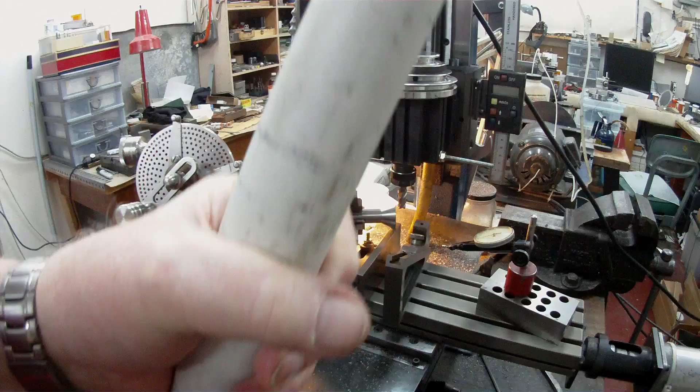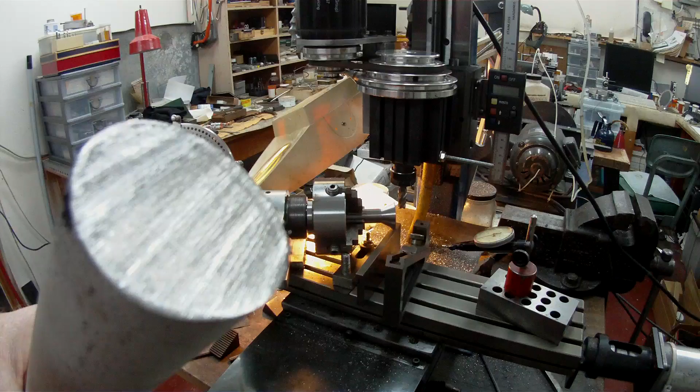If you've seen my other videos, the previous one indicated this material comes from a great big chunk of... I hope you can see that there. It's 1 7/16 diameter. I think it's an axle shaft, it has to be, I would think. Maybe it's a rack and pinion, I don't know, but I'd imagine it's an axle shaft, and it's really hard, really tough material, but the finish is very satisfying, providing you're able to machine the material.

Excuse me a minute, let's put that down. So when I machined, let's see if I can get a pointer of some kind. As usual, I'm not ready. Okay, if you can see this scriber I have here, this is the shank, and this is the 60-degree angle that I machined in this 4-jaw chuck on the lathe, on the big lathe.

Once I'd finished machining the outside, I then took the chuck off the lathe and screwed it onto my dividing head. Came up against a few problems.

The machine is so small and there's so little travel in directions that I was only able to clamp the base of the dividing head down with two 3/16 studs and T-nuts. I had another two slots over here that would have been nice to use as well, but because of the size of the machine I wasn't able to.

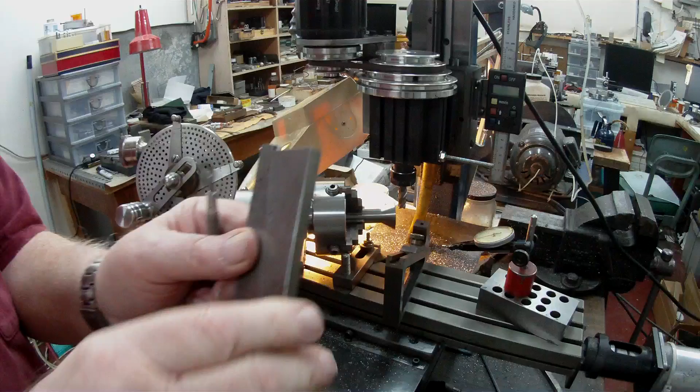I also used one of these, an adjustable parallel, I guess you'd call it. Very handy tools to have, a set of these is nice. So I placed that on the base there, and that goes underneath the arm there to give it support in the downward position.

I decided, instead of doing it the way Randy Richards did his one, where he measured from the top of the largest diameter up there to find the heights, I didn't have a height gauge, vernier gauge, or digital height gauge.

So the only thing I do have is one of these, and these are very handy units. I've used these several times in different jobs. So what I did was use a dial indicator and this to find the distance from the top down to the flat surface where the carbide insert is going to be screwed down onto. What I'll do now is move this camera around so you can get a different view.

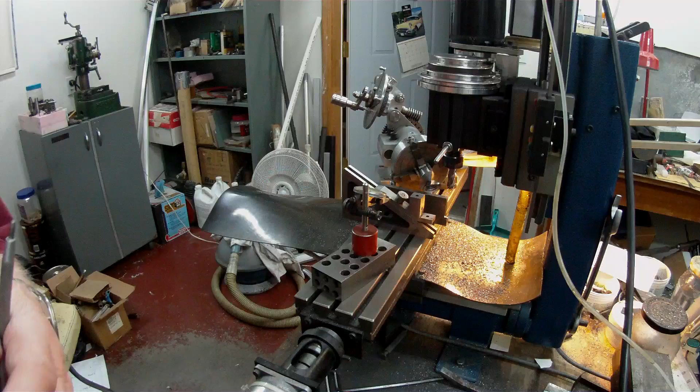Everything I did was a little bit hairy, in the sense that it's so easy to get a dig in, take too much off in one pass, given the hardness of the material you're machining and so forth.

I machined down. I first got the right-hand side edge with an edge finder, and then using a 3/8 carbide end mill, I calculated the distance this one face here has to move in to machine right down through the center, not too far over, but right on the center.

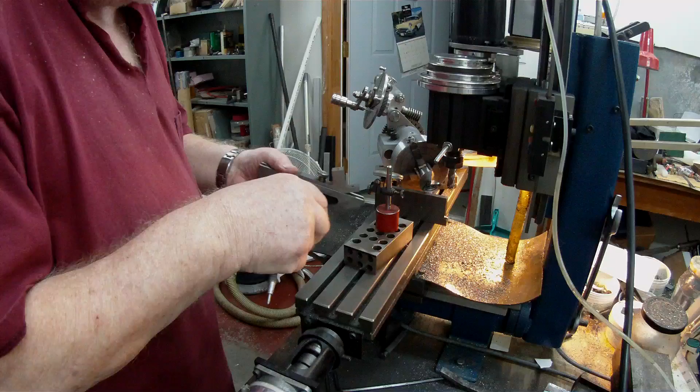At the same time, I had to be sure I was getting the right depth from the top down to that face. So what I actually did was use a dial indicator and the base of the table plus this planer gauge. The first thing I did was measure, or dial in off of this adjustable parallel. I zeroed in on that, and then I placed the planer unit and undid that and moved it down until I got a zero on there.

That allowed me to get a dimension from the table to that top surface. Once I'd got that surface, I knew exactly what the distance was from the top edge down to the center, because I knew the diameter of the workpiece. I halved that, and then added another 1/8 of an inch, which is the thickness of the insert. That way I was able to calculate by getting the distance from here to here.

I then knew what the difference from the base of this largest diameter up to that surface would be, and so I measured the distance from here to here until I got the right calculated distance, which was 2.075 in my case. It would change according to whatever you're using to hold the part.

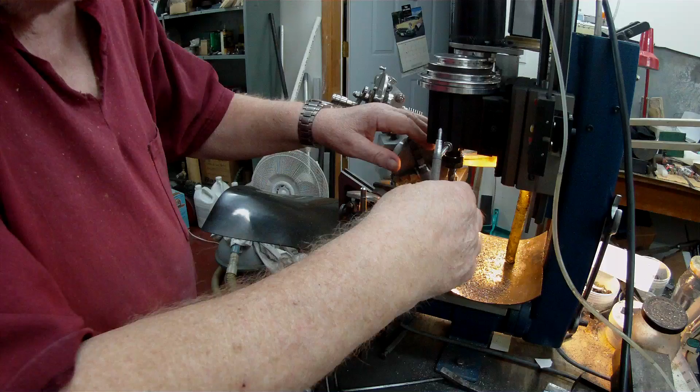Obviously, if this just moves slightly under pressure and the cutter doesn't move with it, it's going to catch and dig, and there's a chance you could have a dig-in and lose your position, your angle, and everything.

So that's how I did it. I actually had to hand sharpen the carbide end mill twice. First I put 45 corners on each flute, and that helped for a while, but then the bottom cutting edge got worn, so it made it feel like, instead of cutting, it was kind of rubbing.

I eventually took the end mill out and hand ground the four bottom flutes, the cutting edges, and it worked. I managed to rough the unit down and got the bottom within 5 thou. That's when I took the worn cutter out and replaced it with a brand new one, and just took the final 5 thou off the bottom face and cleaned up the vertical face.

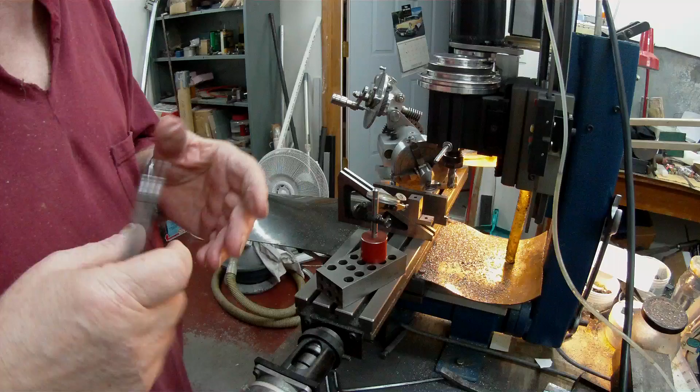That's going to be the final part of this cutter. If it's successful, it's going to be a nice cutter, very, very strong, a good holder. The only problem now is to make sure I don't break a tap when I'm tapping. So what I'm going to do is make the tapping hole larger, so I have less thread to tap. Obviously less thread to hold, but if I make it just a little bit bigger, it'll ease the tap, make it easier to tap, and it should still hold plenty strong enough.

So that's about it. I did have a, hang on, I've got a... what did I do with it? Oh, here it is. Oh dear. Yes, so...

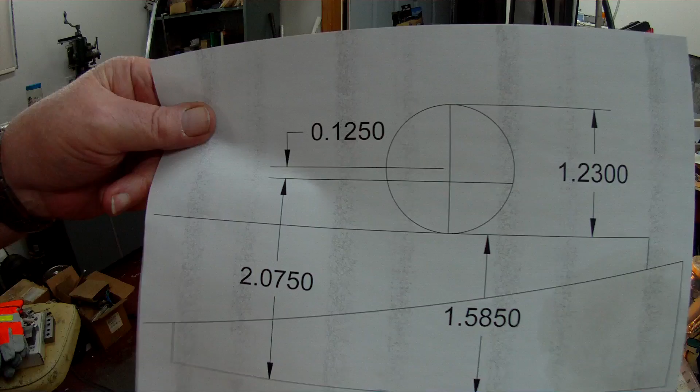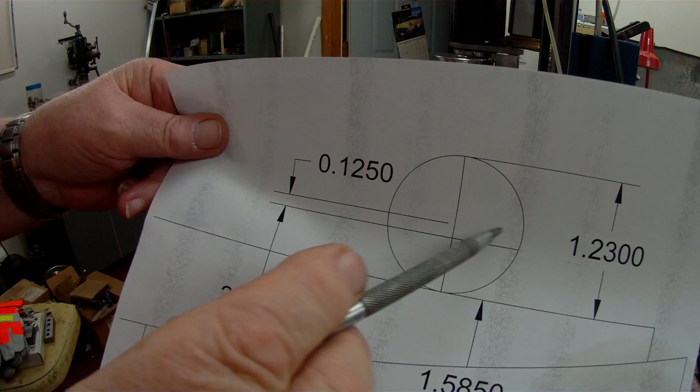This is what I worked on to calculate the distance from the table. This represents the bottom of the table, and this is the one adjustable gauge, and that's the dimensions I came up with. This was the final dimension required to allow the insert to be right on the centerline. Obviously this is the opposite way round - the insert will be on this side.

I hope that's plain for you to understand. I'm sorry there's no video of the actual machining, but it was so long - I did it over a 3-day stage, and since I can't edit, I felt it would be a waste of time, and it wasn't perfect by any means, what with the first carbide end mill rubbing and not working very well. I just didn't feel it was worthwhile to show something like that.